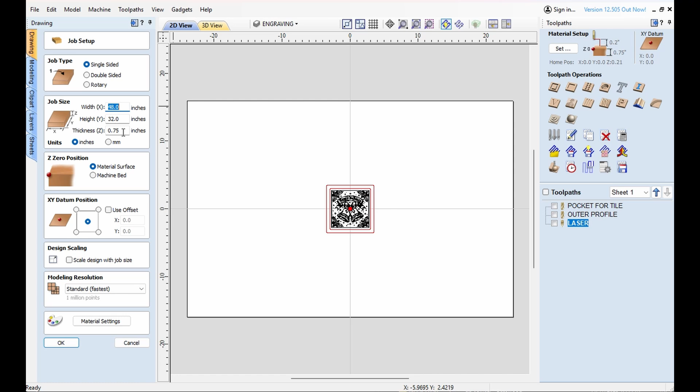750 thousandths thick, 3/4 of an inch, which is my standard. I'm just checking that. Okay, and here we go. So you'll have a piece, and this piece here is 7 by 7. You can change that to whatever you want, but I feel the 7 by 7 works pretty good with a 6-inch tile. Since I don't make or cut the tiles, I just buy them, that's what I'm going with. There'll be a link for that somewhere in the description.

In any case, let's go to the pocket for the tile. So this is our outside, and this right here is our pocket. 250 deep. The tiles I buy are about 300 thousandths thick, about 1/3 of an inch, and I want the tile to sit slightly proud of the wood. Because if you put a big hot pan, like a cast iron pan, on there, I want that tile to hold the pan above the wood so you can't scorch it. It's all on the tile. That's how I come up with the 1/4 inch deep.

You'll also notice this is a pocket. We're going to pocket out that whole thing so that the tile sits down in there.

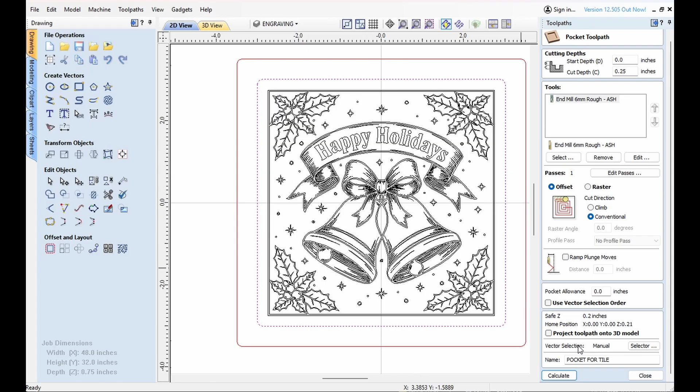All right, we'll do a conventional cut to cut that out of there. We're only going 1/4 inch deep, so I don't think we'll need to ramp the plunge moves at all. Depending on your wood cutter situation, you may want to do that. I'm going to call it pocket for tile, and we will calculate that.

Okay, now let's take a look at that just for grins, and I want to preview visible toolpaths, not all of them. As you can see, it does just cut a pocket. Something to be said here, and I'll go over this more later—since the tool we use is round, we can't get a sharp corner here, right? It's the radius of the tool we're using. I'm using a small one, 6mm. You might be using something bigger. We will have to radius the corners of the tile to make that fit right. I'll get into that more in the machining part, but just to make you aware of that.

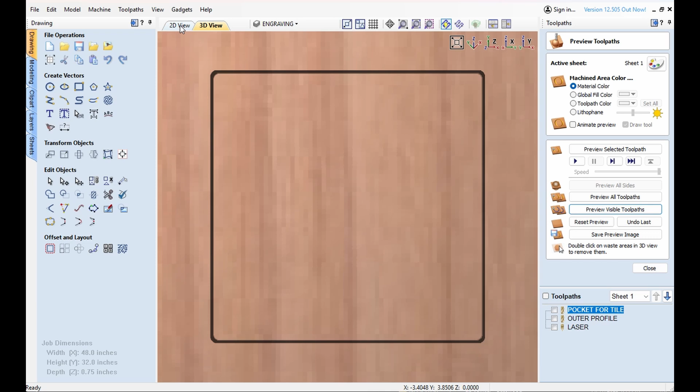Okay, so now let's do the outer profile. You can see it's the outer profile. This should all be pretty easy for you now. It's going all the way through. It's on the outside because it is the outer profile. I'm going to do a quick ramp on here like I always do, just to take it easy on my bits.

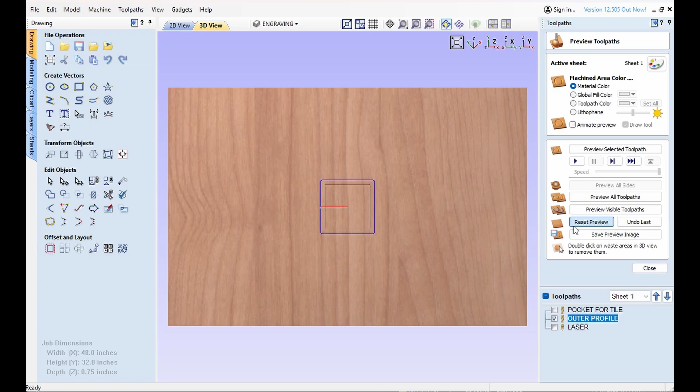And we'll call that outer profile. Okay, so there you go. That's the outer profile. Again, I will show you what this looks like—preview the visible toolpaths. Okay, get rid of the outside here. So that's really the piece that we're machining. That's what it looks like. It's a square, 7 inches, and it's got this pocket to accept that tile.

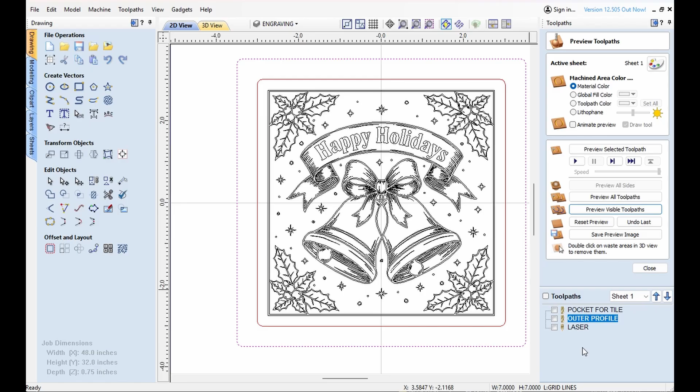So that looks good. Okay, now you have to remember in this CAD that we are going to laser engrave that tile. So whether you want to do this in that file or out of it or whatever, since the laser doesn't touch the part, the tile itself, I would do it in a separate file, and you don't have to clamp your tile down. Basically, you just set it there, find the middle of your tile, and then zero the laser to that. I'll go into that in the shop section of this video, but that's the way I do it. So let us go to the laser.

A lot of guys want to use LightBurn, that's fine. They want to use a laser module from VCarve, that's fine too. I don't do it that way. I use just a regular profile toolpath, so it goes on the line and stuff.

Something weird about the VCarve software, especially the preview, is that it won't show you the laser. It'll show you the toolpaths, but it won't show you the laser. So be aware of that. You have to look at it with the toolpaths.

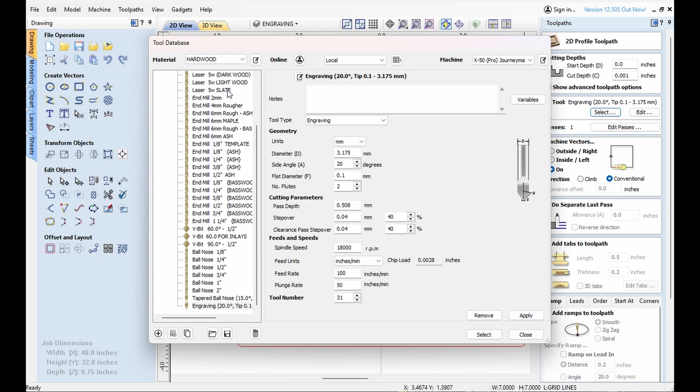My cut depth is 0.001. Why do I use that? Because of the way I have my laser set up, and I only want it to make one pass, and that's how I get it to make one pass. I'll select it, and I know for me I want to go laser slate, that is the slowest feed that I have, because I know from experience when I'm engraving these porcelain tiles that works good for me. I want to go right on the line.

I don't want any tabs, we went over that. I don't want any ramps, we went over that. And I'll call that laser, or I'll call it something like laser engraving. What if I put a space in there? Laser engraving, okay, there we go.

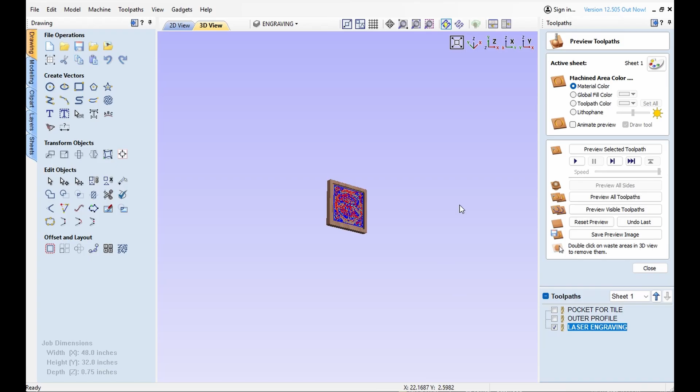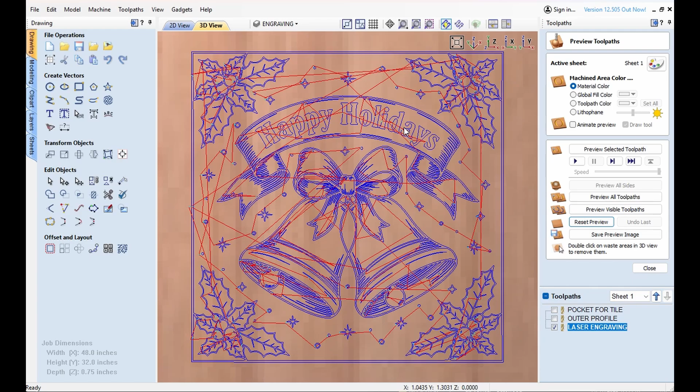And then I'll calculate it. All right, so now if I reset the preview, that's what it's going to laser engrave. Watch what happens when I preview the toolpaths. It'll take out the toolpaths and show me what it's going to cut, but it won't show any of that. Don't freak out if you're doing this the way I'm doing it and it doesn't show you that. This is just preview all toolpaths. Here we go.

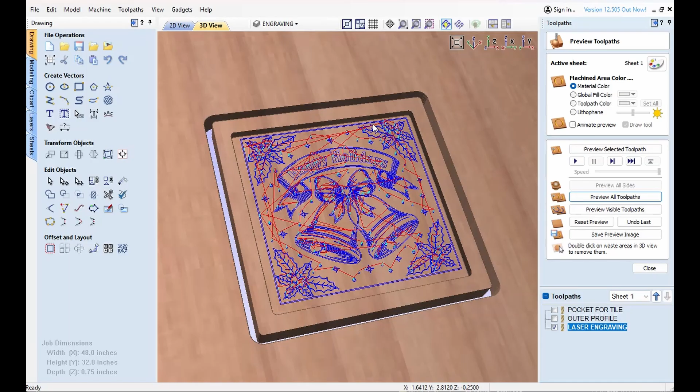It didn't engrave it, there's nothing there. Yes it did, it's just a quirk of the software that it did not show you that. The first time I did that, I chased my tail for a couple of minutes trying to figure out what was going on until I figured it out. All right, so that's it.

All right, so take off all those toolpaths. There you have it, that's what it is. Remember again that we are going to save these toolpaths separately. The pocket and the outer profile are the same, so we can save those as a file with the 6mm, no tool change. But then we need to save the laser part separately.

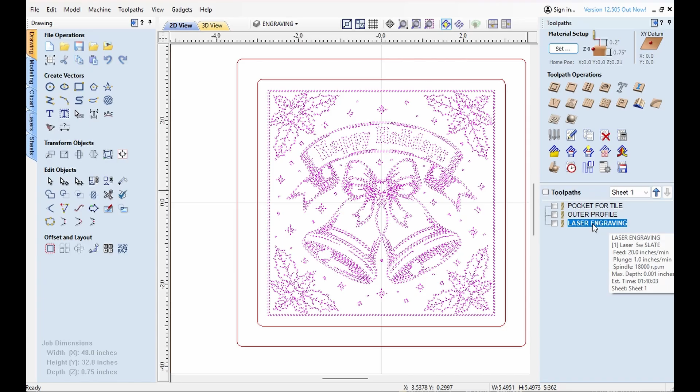When you do this, let's just save the laser part separately here. Make sure that your post-processor is correct. Again, LightBurn is going to be different, laser module is going to be different, but I have a post processor that I have set up for a laser. What does that do in my post processor? It takes away all the Z-axis movement, it just has the X and Y movement. So, something to be aware of on your post processor there.

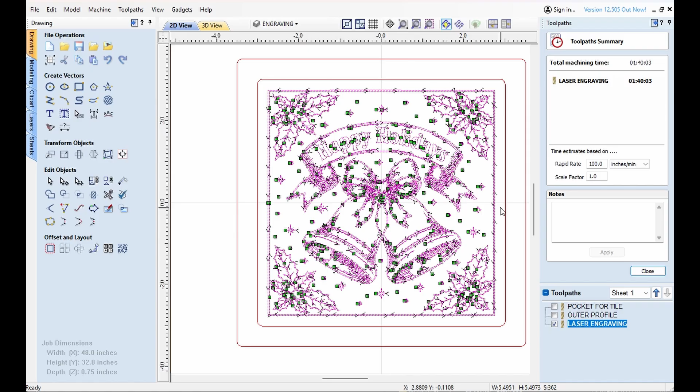I'm not actually going to do this. I'm wondering how long this is going to take. I know that the laser moves quite slowly on the setting that I have it. This one's going to take a while. Let's just kind of see. So, with that said, let's get out to the shop and cut the wood part and engrave the laser part.

All right, so the first step in the preparation of the tile is to make sure that it is absolutely clean. I wash these with hot Dawn dish soap and water so that it's absolutely clean. The second step is to paint it.

I have found that the key ingredient in the spray paint that you want to use, if you want to use spray paint, is titanium dioxide. It's used in the grand majority of white spray paints, not in all of them, so look on the label, but it's in the grand majority. In my case, I'm just going to use this stuff because it's what's available around here. You can also use titanium dioxide, you can buy that on Amazon, it comes in like a powder. You mix it with water and you can paint that on. That works very well.

I give it two coats, first coat's kind of light, second coat's kind of heavy. It is very important that you put these coats on as evenly as you can. If you get a thicker spot somewhere than other places, that'll show in the laser engraving part of it. So be careful, spend a little time. Numerous thin coats are better than one thick coat, but just get a very even coat. So I'm going to do that now, and I'll let them dry between coats, and we'll come back when we're ready to laser engrave it.

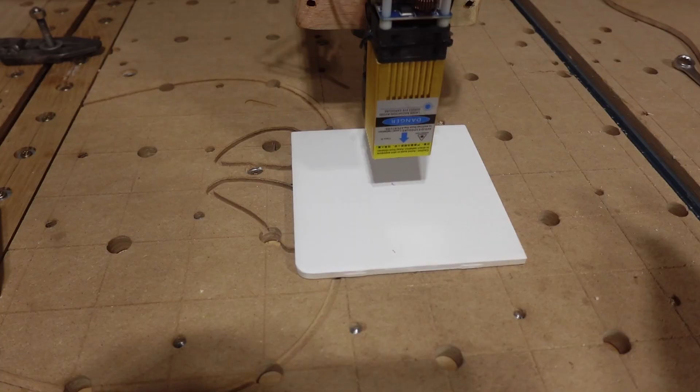Okay, I have the G-code loaded up in the machine here. As you can see, cycle time's a little over 29 minutes. I have this zeroed out so that the laser is starting right in the middle of that ceramic tile that we have painted, and it is of the proper height. I have my protective shades on, and we are going to hit the start button.

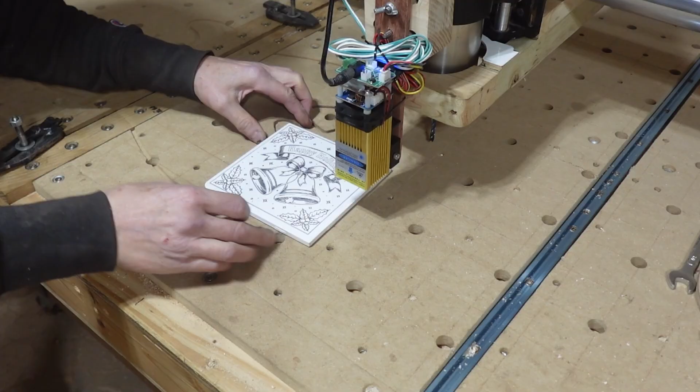Well, there you go, looks pretty good. I'm going to take it inside and wash off the paint. There is paint on here yet, and then it becomes even crisper and more contrast to it.

So let's do that. The wood part for the porcelain trivet is about 7 inches square, so what we'll do is cut this piece. This piece is 7 3/4 inches, so we'll cut them a little big again, just to make them square, and then we'll have some material to trim off. If I was batching these and making a whole bunch, I would cut them almost exact, just enough to sand off the edges. But I'm just making one, so I might as well go on the safe side.

And since that porcelain trivet is only 7 inches square, and this is bigger than that, no glue up on this one.

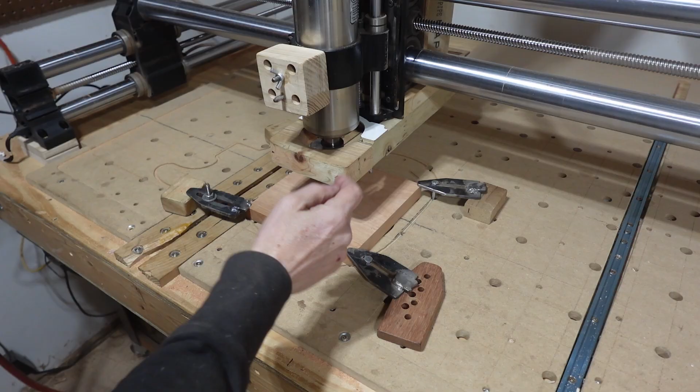So all this is going to do is cut a pocket that's 1/4 inch deep and 6 inches by 6 inches, that piece of porcelain or tile will sit in. As you recall, when we programmed that depth at 1/4 inch, the tile will sit slightly proud of the wood, so the wood won't get scorched if you set anything heavy on it.

So, let's fire it up. Again, I'm leaving the dust collection off just so you can see it.

There you have it. We'll move this out of the way so you can see. And it just cut that pocket in there.

Okay, so all I did here was sand the edges, put a sanded radius on the corners here. That's really all I did. I broke these just a little bit. Those bits I use in the CNC router are very sharp, so that's a sharp edge there, and I broke that a little bit. Let's see how she fits here.